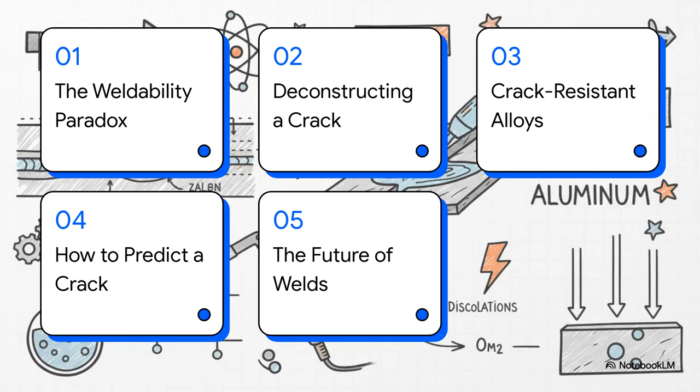So here's our game plan for today. We're going to start with that paradox. Then we'll deconstruct a weld crack to see what's actually going on. From there, we'll get into the cool stuff, how new alloys are being designed, how we can predict cracks before they happen, and what the future of welding is going to look like.

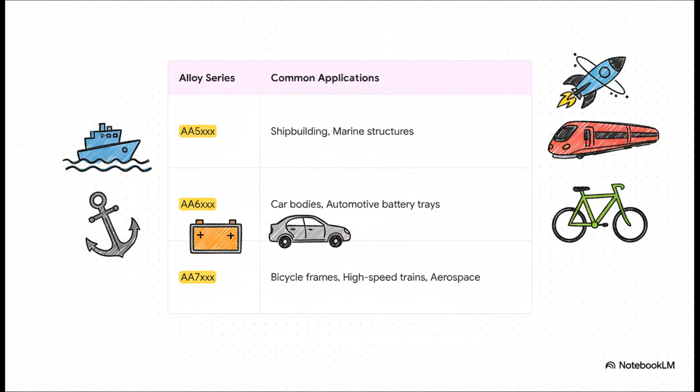All right, so let's really dig into why this problem is so critical. We're talking about the high-stakes world of advanced materials, where choosing just one alloy can make or break multi-billion-dollar projects. High-performance aluminum is pretty much all around us, even if we don't always see it. The 5000 series, that's building our ships. The 6000 series is probably in the body of your car. But it's this 7000 series we're really focused on today. That's the elite stuff for things that have to be incredibly strong and light, like high-speed trains and spacecraft. And this is exactly where that welding problem becomes a huge roadblock to innovation.

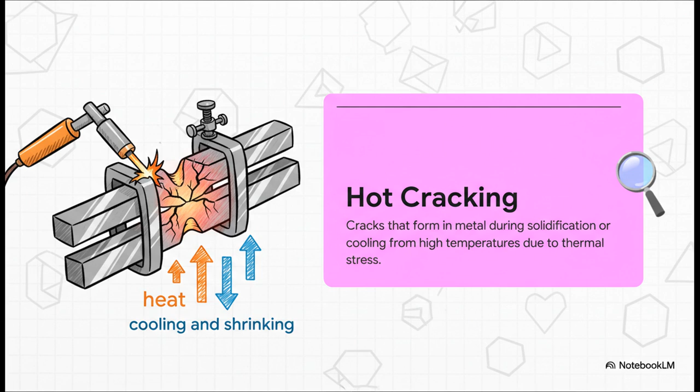To solve any problem, you first have to really understand it. So let's zoom way in and look at what's happening on a microscopic level when one of these welds actually fails. It's a pretty fascinating and destructive process. Okay, so the main villain in our story is something called hot cracking. Just picture what happens during a weld. You melt the metal, right? And then it cools down and shrinks. Now, if that piece of metal is clamped down and can't shrink freely, these immense stresses start to build up. And when the metal's in that fragile, semi-solid state, not quite liquid, not quite solid, it's at its most vulnerable, and it can literally just tear itself apart.

And what's really fascinating here is that the crack isn't just one single event. It's actually two different kinds of failure happening at once. The most obvious one is right in the weld itself, in what they call the fusion zone, as all that molten metal turns back into a solid. But there's a sneakier problem happening in the metal right next to the weld. It gets just hot enough that the edges of the metal's internal grains start to melt, creating this weak, brittle network that just cracks super easily under stress.

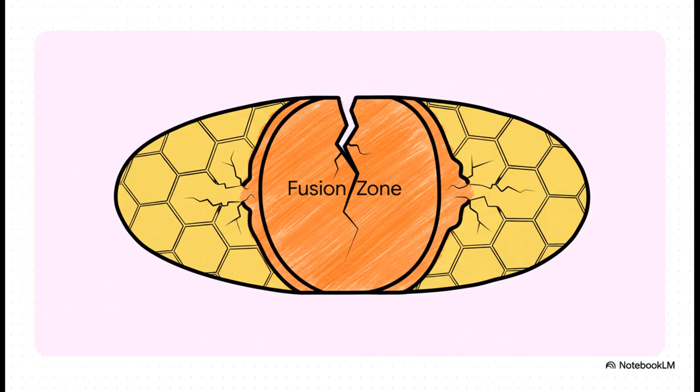So now we understand the enemy. How in the world do we fight it? Well, this is where it gets really, really clever. Instead of just trying to perfect the welding process, researchers decided to go back to the source and basically rewrite the material's DNA. And here it is, the big breakthrough.

For decades, the recipe for these high-strength alloys always included a high ratio of zinc to magnesium. But scientists discovered that if they flipped that recipe, using more magnesium than zinc, it fundamentally changed how the metal solidified. So why does that work?

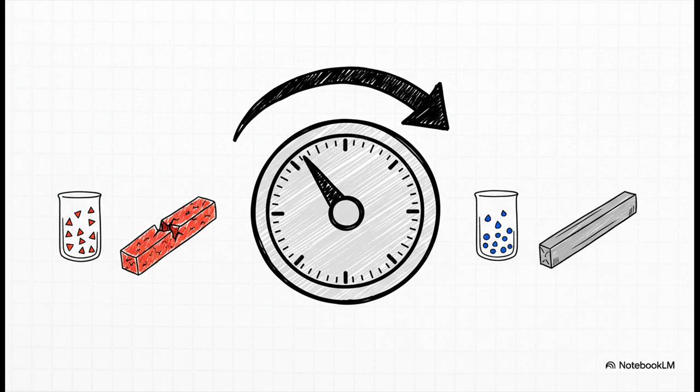Well, this tiny chemical tweak actually stops a brittle, low melting point film from forming between the metal grains as they cool. And that film is exactly what gives cracks a perfect little highway to tear right through the material. And the data? The data proves it works, big time.

A standard weldable alloy, that 5000 series, has a strength of about 144 megapascals. That's just a unit of pressure. The unweldable 7000 series is way stronger at 392. But now, look at the new alloy in the middle. It welds perfectly, and it has a strength of 404 megapascals, even stronger than the original. They didn't just find a compromise, they actually created something better.

This chart just makes the achievement so incredibly clear. That new alloy isn't some middle ground compromise. It completely solves the welding problem, and it's even stronger than the old unweldable version. This is what a real material science breakthrough looks like.

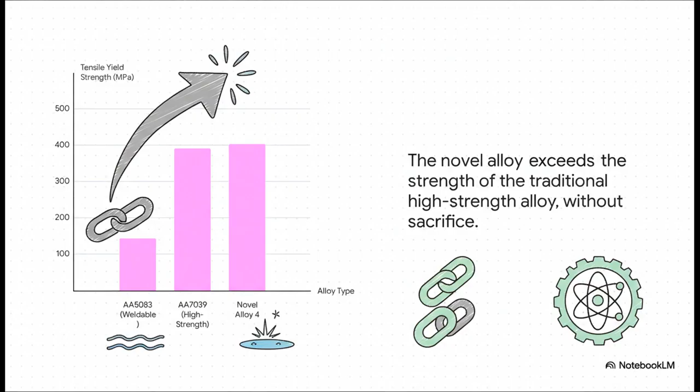Okay, so how do scientists test these amazing new materials without just doing costly, massive trial and error experiments? I mean, you can't just weld a whole airplane wing to see if it'll crack, right? They needed better, more precise ways to actually measure weldability. And that need led to some really clever new testing methods.

We're going to look at two of them, the circular patch test and the more advanced controlled tensile weldability, or CTW test. And these aren't just pass-fail. They let researchers put a precise number on just how resistant an alloy is to cracking.

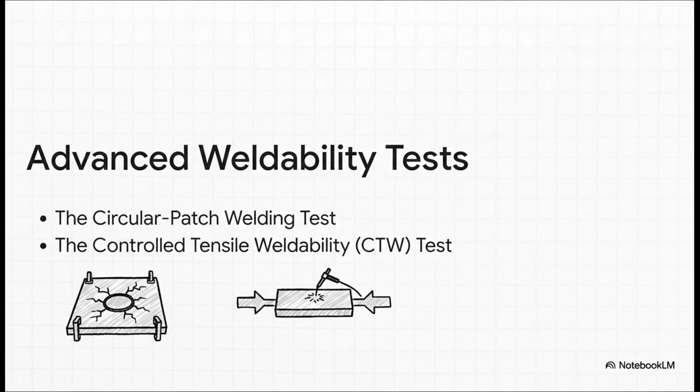So this is the circular patch test, and the idea is simple, but man, it is brutal. You take a plate of the alloy, you clamp it down so it absolutely cannot move, and then you weld a circle right in the middle. As that circular weld cools down and tries to shrink, the clamps resist, creating these insane levels of stress. It's basically a torture test designed to find the material's absolute breaking point.

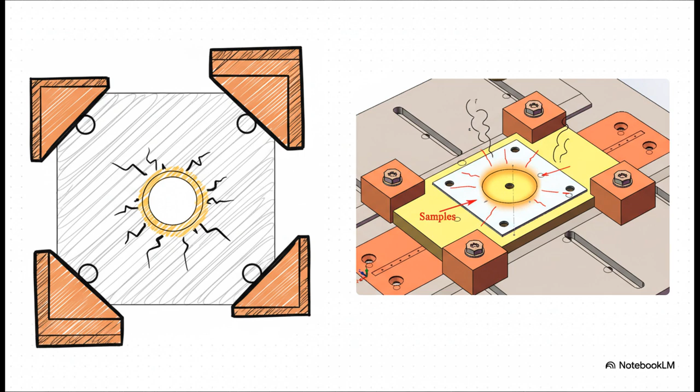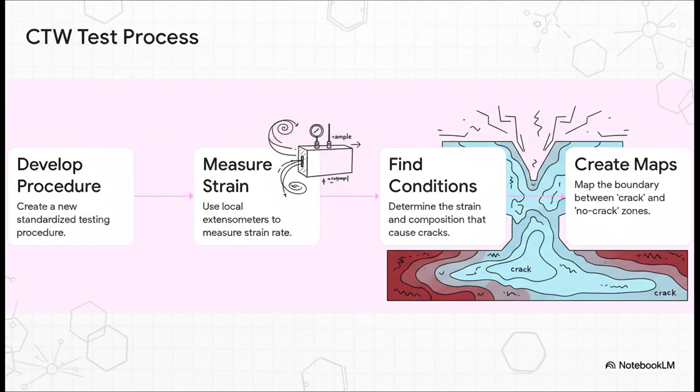The CTW test, though, is even more sophisticated. It uses these incredibly precise instruments to measure the exact amount of strain on the metal as it's being welded. So this isn't just a simple pass or fail anymore. It allows scientists to create these super detailed maps showing the precise boundary line where an alloy will crack versus where it'll hold strong. This is predictive power on a completely new level.

Of course, in science, solving one huge problem often just reveals new, more subtle ones. So while these are massive breakthroughs, the quest for the absolutely perfect weld, well, it isn't over yet. So the next frontier is all about purity and structure. For example, even tiny amounts of hydrogen gas can sneak into the weld and cause huge problems.

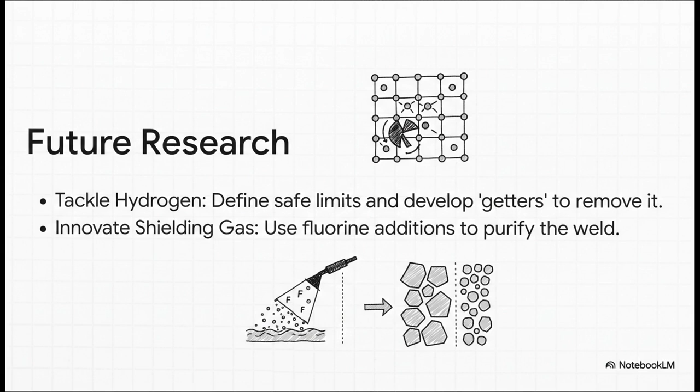So now researchers are looking at ways to trap it with elements called getters, or even using special shielding gases to purify the weld on the fly. And at the same time, they're adding things like scandium to refine the metal's internal grain structure, making that final weld even stronger. So what's the big takeaway here?

We are making the unweldable weldable by combining two really powerful ideas. Going back to the fundamentals of metallurgy to literally rewrite the recipe, and then using advanced testing to prove that the new theories actually work. It's this one-two punch of deep science and smart engineering that's unlocking the materials of the future.

And that really leaves us with a final thought. We've cracked the code for high-strength aluminum. But as we keep pushing the limits of science and engineering further and further, it really makes you wonder, what other seemingly impossible materials are just one big breakthrough away from completely changing our world?